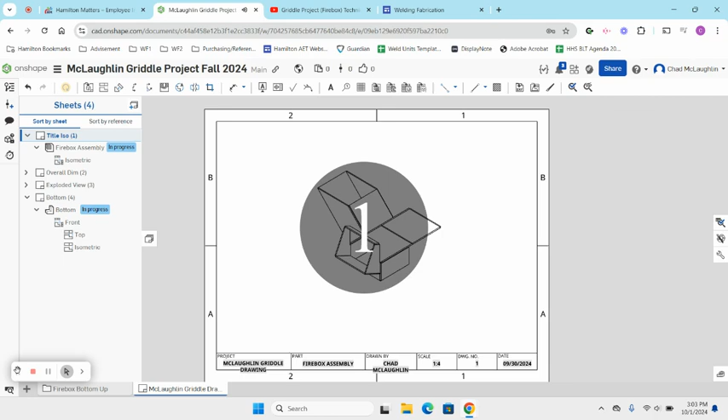Okay, now that I'm starting to work on my drawing file, I'll continue with this, but I want to keep modeling some parts. We did the firebox already.

What I want to do is create a new folder for the actual griddle plate. I'm going to click the plus, go to create folder. I'm going to call this griddle plate.

Then we're going to go top down. This is a different modeling method. I am going to put it right behind, I keep my drawing last. But this is a different modeling method that turns out to be a lot easier in some aspects.

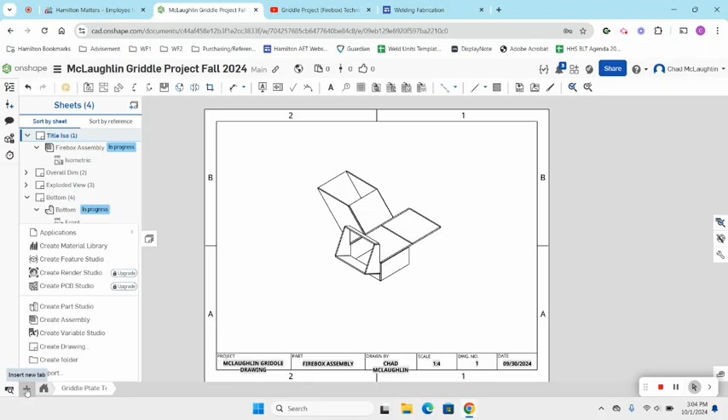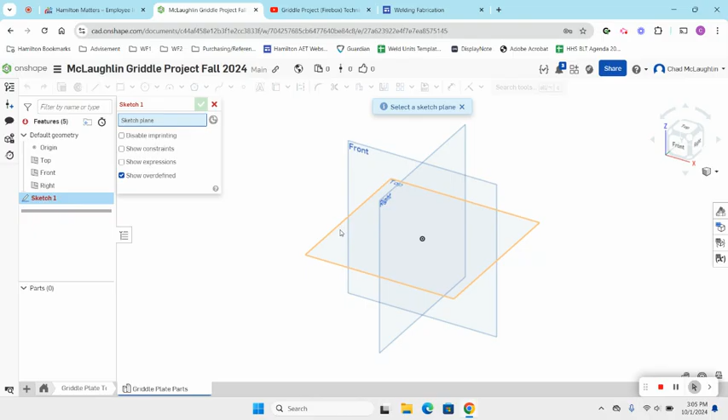So I'm going to create a part studio. I'm going to title this Griddle Plate Parts. The first thing I want to do is sketch on the top plane. I'm going to put a rectangle in from the origin.

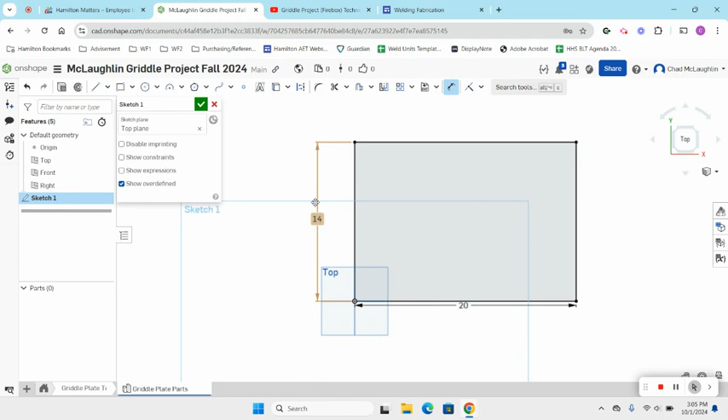The size of that rectangle is going to be 20 inches by 14. I'm going to click check. And I can extrude this, and we're using 10 gauge, so 0.135. There I have my first part.

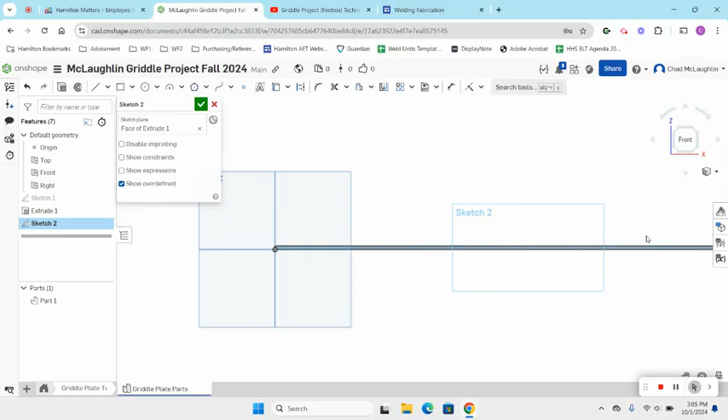Now a neat feature that we can do is sketch onto the front, and this is top down again. I'm going to hover over that origin, not clicking, and I'm going to come down, draw a rectangle like that.

I can put in a construction line, so I'm going to click line, go construction. When I see that orange square, that means it's the center point. I'll put that in. All right.

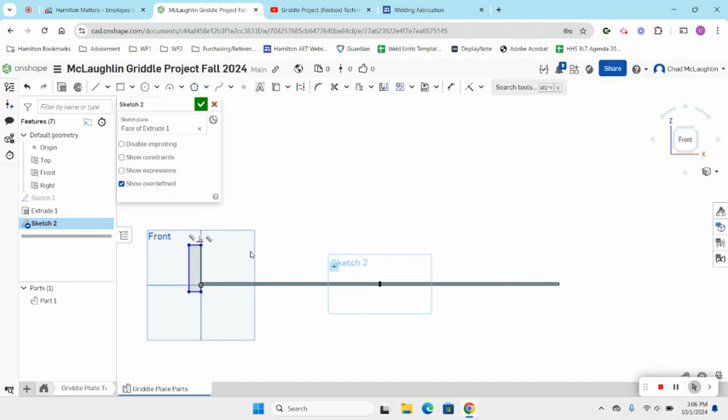What I'm going to do here is dimension this part, and this is going to be the front view of the part. I want that to be 1 inch tall. I want from the bottom of our griddle plate to the bottom of this rail, we're going to call it, to be 0.125, which is 1/8. And then it's going to have a thickness of 0.135 for the 10 gauge.

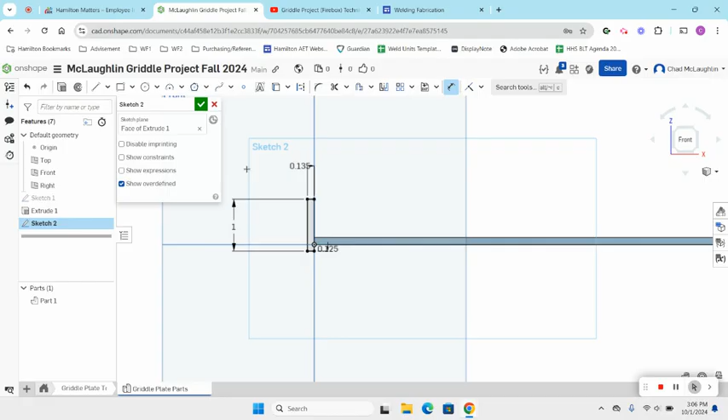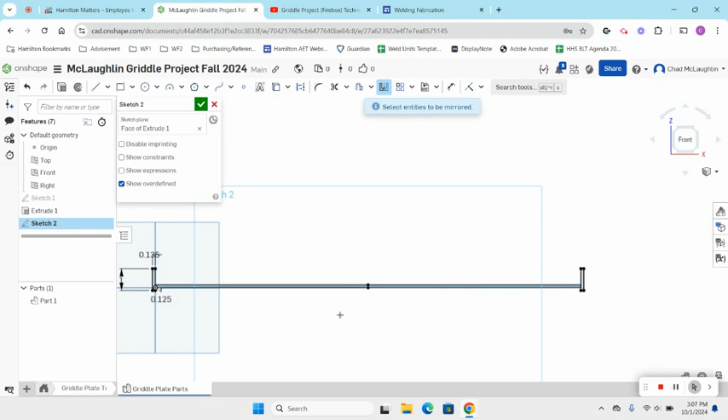Now that I have that dimensioned, I'll pull it off so you can see it. I can go mirror, select that center line I put in. And now I need to select the entities. If I just highlight it, it'll bring it to the other side with the same exact dimensions that were on the left side. I'm going to now go to extrude.

It's coming off towards me. I want to flip direction, and we are 14 in depth. I want to go to the back. All right, it's saying add. I want to do new parts.

And now you can see part 1, 2, 3. Now, that part 1 was the griddle plate, so I'm going to rename it griddle plate. And these ones are our part 2 and 3.

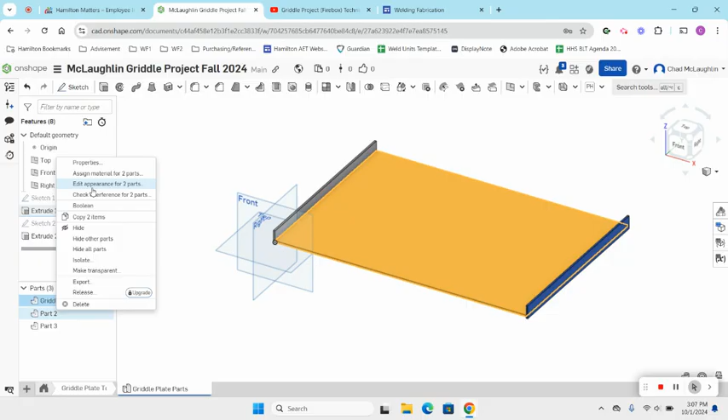I'm going to rename rail 14 for how long it is.

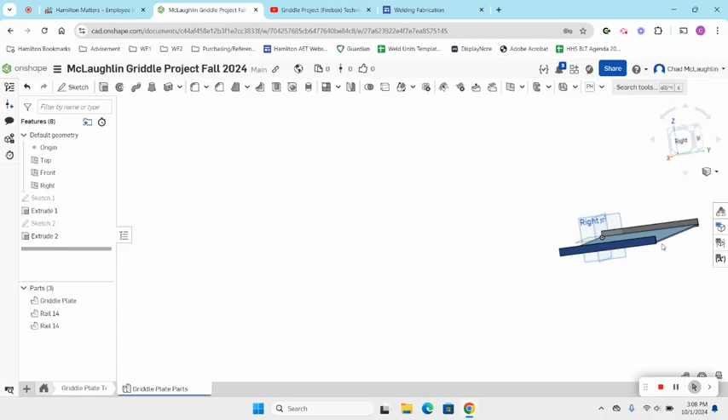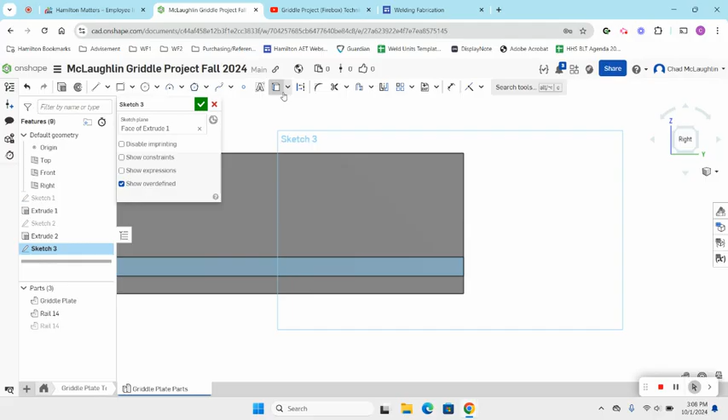I'm going to hide this rail. So I'm going to go over here, see that eyeball? I can click it. I want to go sketch on that surface, and I'm going to normal to the right. And if I click and drag here from convert entities, I'll convert there, and then I'll click.

This is going to be the back one. So it's already pretty much fully defined. All I need is that thickness of 0.135.

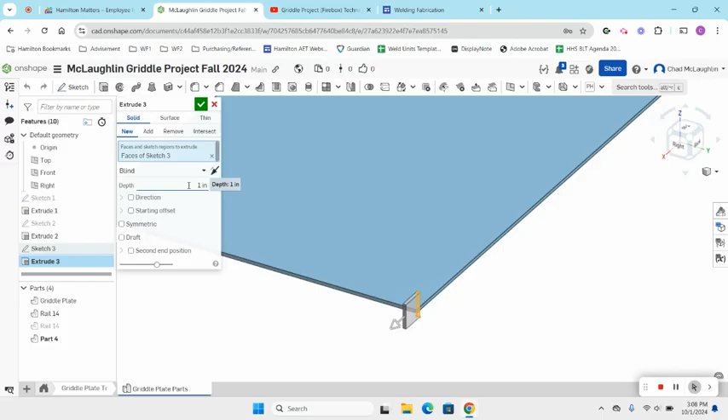Now I'm going to go to extrude, new part, 20. I'm going to flip directions. It's saying new, good. I can now re-show that one, and I'll rename this one Rail 20.